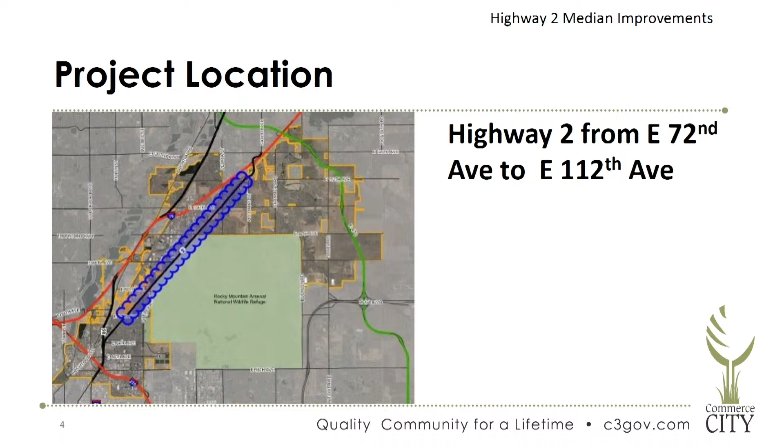Project goals: the primary purpose of this particular CIP project is to replace the current painted median that we have along Highway 2 in particular segments. The goal would then be to improve safety by replacing that painted median with alternative options, which would reduce the number of accidents and lessen the severity of any accidents that do still occur after improvements have taken place.

So again, we have 3 improvement options. Option number 1 is to build medians along that entire corridor we just looked at. For this project, the city does have $3.2 million already allocated and available to spend. We're also working on an IGA with CDOT that would hopefully provide an additional $1.9 million. That would be a huge win for us, but essentially we're looking at 3.2 right now with certainty. So option 1, constructing traditional raised medians along the entire corridor, is going to cost us $24.3 million.

So of course, we have a bit of a shortfall. We can't complete that project within our current budget. But thankfully, we do have some alternative options.

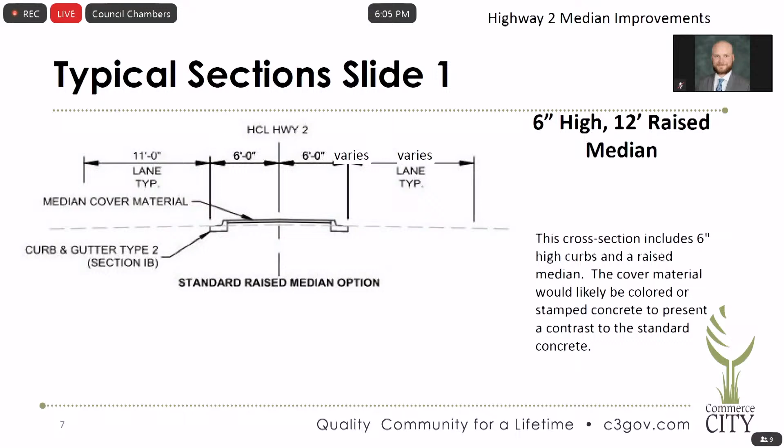This typical section here is representative of a two-way left turn lane, and this is a condition that already exists on the south end of Highway 2. It essentially just allows vehicles to turn left from both directions on a road.

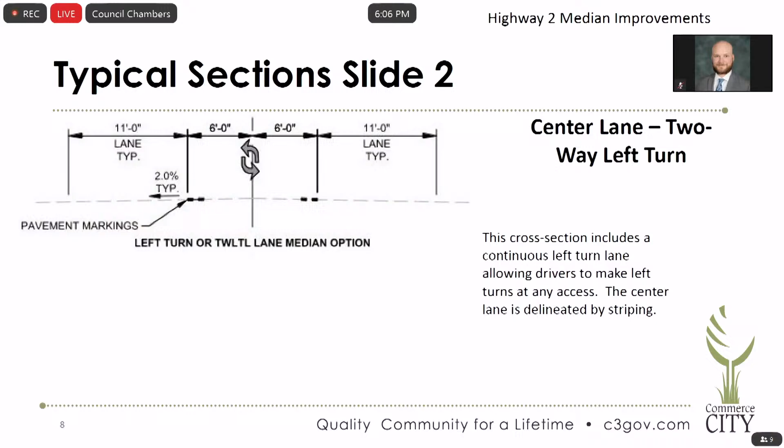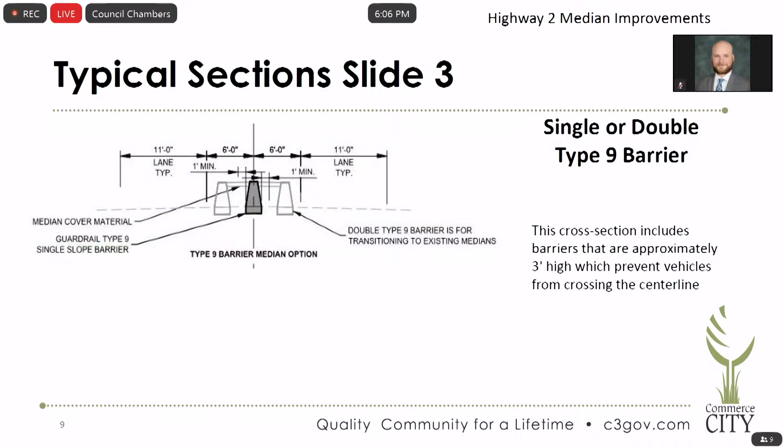Typical section 3 is representative of a single or double barrier option. Type 9 barrier language refers to a concrete barrier, either single or double. Finally, this typical section represents what rumble strips and delineators would look like, which would alert drivers that they're starting to cross over the painted median.

So we're going to dive into looking at the 7 different segments of Highway 2. These segments are purely based on major intersection to major intersection, and they're not in any sort of prioritization order.

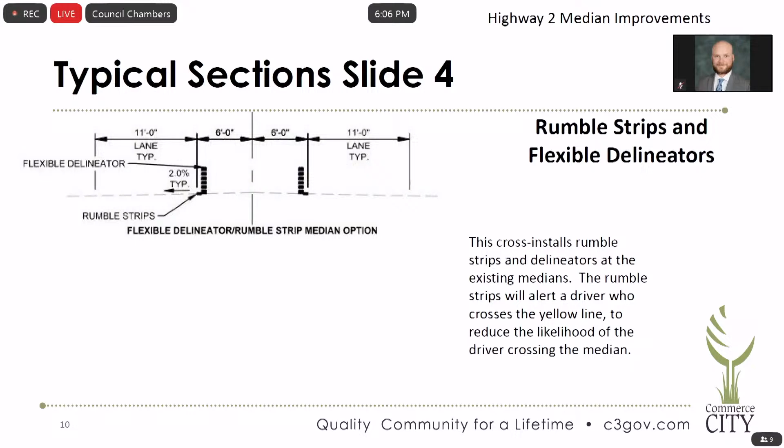Segment 2 is Quebec Parkway to East 88th Avenue, and this is where the design team had to get a little more creative with what makes sense for traffic while still being safe. We show where raised medians would go, and also where it would be appropriate to have a single type 9 barrier or a double type 9 barrier.

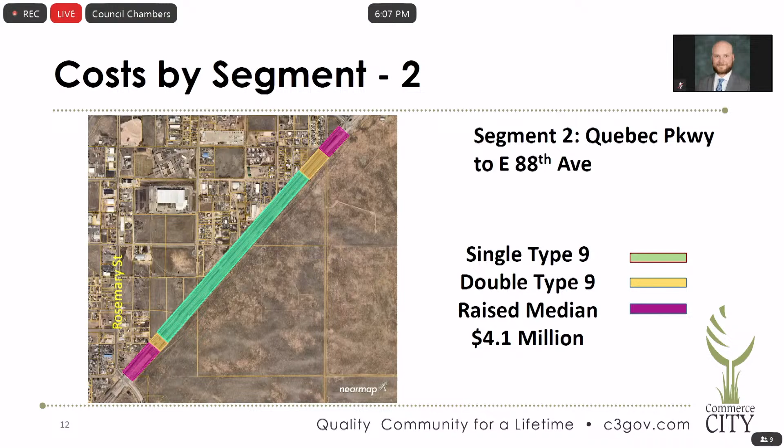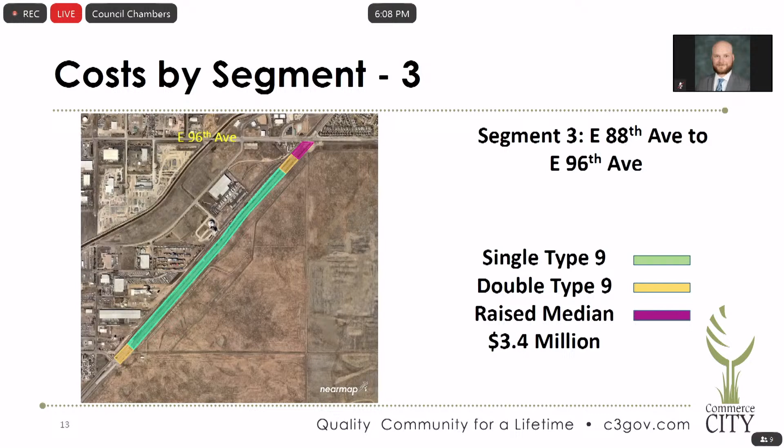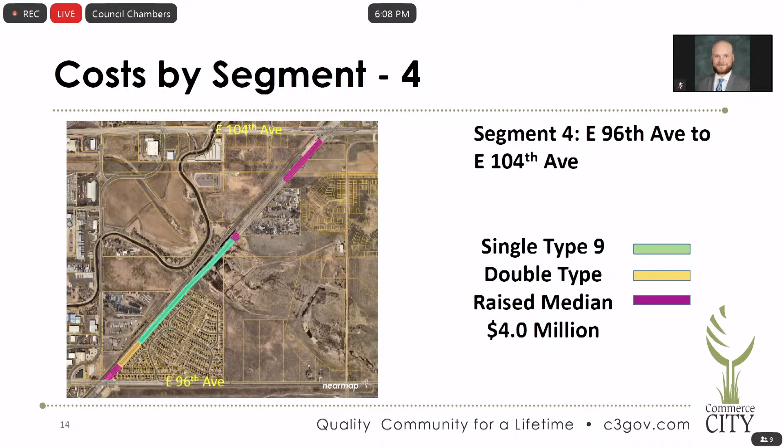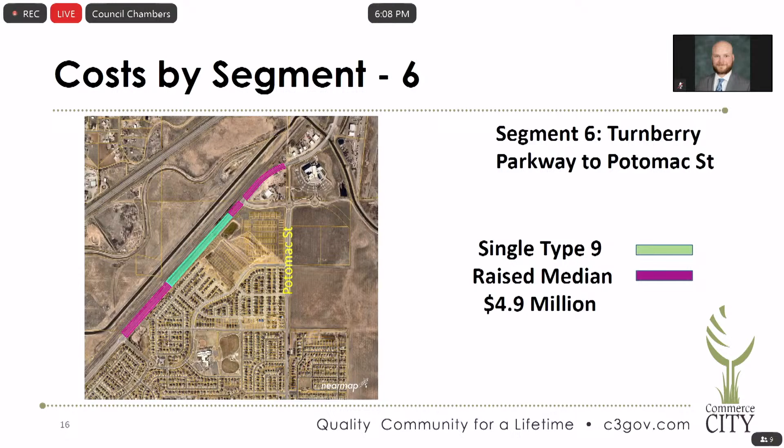Segment 6, Turnberry Parkway to Potomac, where it would only be appropriate to have a single type 9 barrier or raised median option. Our last segment is Potomac Street to the end of the roadway, where it would only be appropriate to do a raised median.

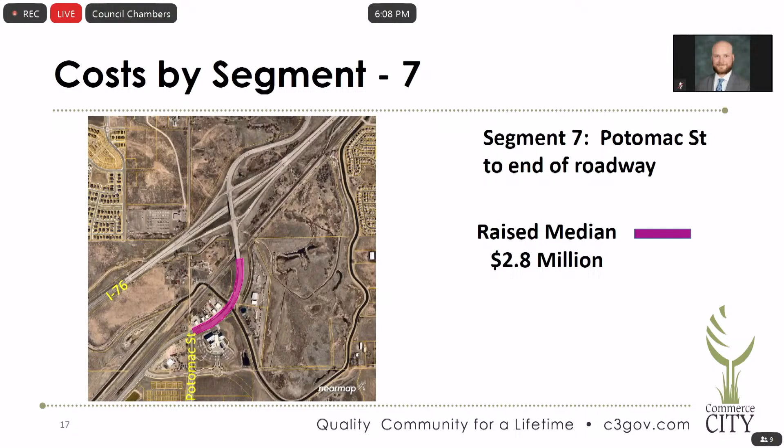Now, the alternative I alluded to earlier would be installing rumble strips and delineators, which we could do across all 7 segments. We would not have to pick or prioritize segments — we have it within our budget to take care of this right now.

So really the discussion we have to have is, does council want to continue down the initial path of installing raised medians? If so, how do we prioritize which segment we do that for within our current budget? Alternative 2 would be to install the simplified treatments we looked at across all 7 segments within the current budget.

That's the open conversation I'm hoping to have this evening. What's council's desire? How do we prioritize installing along Highway 2? Our team has done great design work to get us to this point, but we simply cannot move forward without council's direction on how you'd like us to handle safety on Highway 2. I'll leave this up because I know there are a lot of options here.

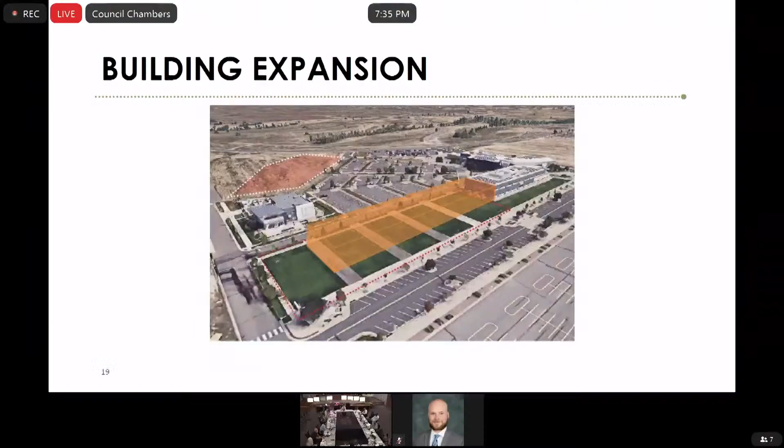If you look to the northwest, there's an expansion too of the parking lot, that's the orange section at the top of that slide. And this is just looking at it from another angle, showing you those grassy fields to the west of the existing Civic Center and how that building would naturally expand to the west if we so choose.

The soft costs are detailed in the next few slides. The total amount with the soft costs is around $61 million. Again, very, very preliminary numbers, but we did reach out to contractors to try and get the best current conditions for that.

Want to talk about funding? Yes, talk about funding options.

We also wanted to give you not just the cost of construction, but what we believe is the only available option for funding a project of this magnitude. As discussed tonight around our fund balance, we do not have the liquidity or capacity within our general fund balance to provide full funding for a project of this kind, nor would we make that fiscal recommendation, as it would not be in the best interest of the fiscal health of the city.